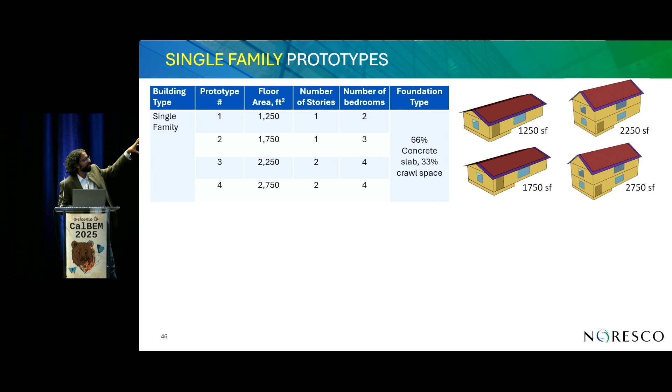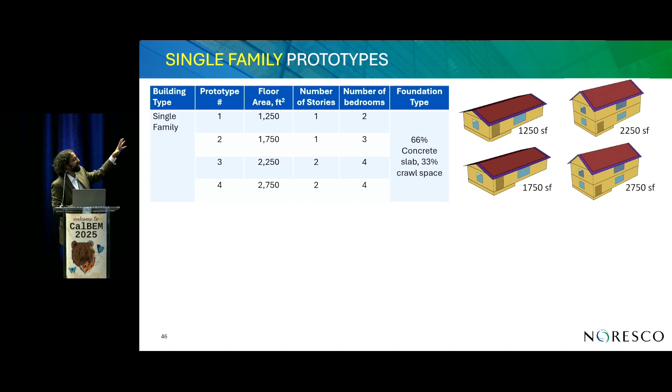So it's really important to get this part right, because everything else will be based on that, and having this representation of the stock is really important. This table shows the 4 prototypes, the number of stories, the number of bedrooms, and the foundation type as well—all based on data that we got from RASS.

We also looked at vintage bins. We've gone with 4 existing vintage bins and 1 new construction vintage bin, again based on a lot of data from RASS and other sources. We looked at when construction happened within the state—there were periods of economic boom and bust, so that was one criteria. Another was when the codes experienced a significant amount of change. A third criteria was technological breaks, like going from a single pane window to a double pane window, which happened around the 2005-2006 period. Those were the kinds of factors considered when we decided the vintage binning.

You can actually go more granular than this, but there's also the aspect of being too granular and having too many models, because when you're doing policymaking analyses, you don't want too many models—that creates another problem, which is managing all of the data that comes out of it, doing QC, managing the data, and so on. So we've created this as an intermediate between being too simple and too complex, and there's basis behind that which is documented.

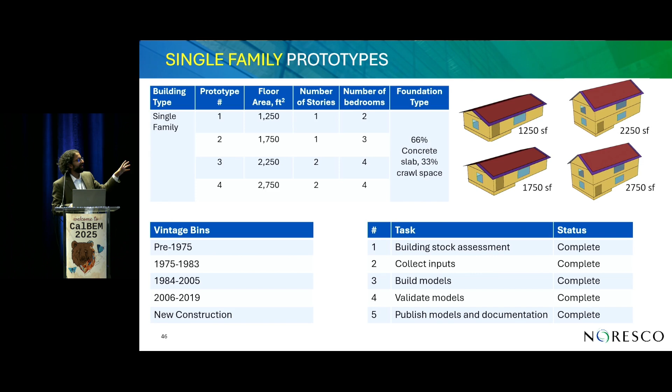So here are the different phases. All of these are now complete: the stock assessment, the input collection, building of the models, and the validation. The models have been published, and the documentation is available as well, so you can go access the models, and I'll show where that's located.

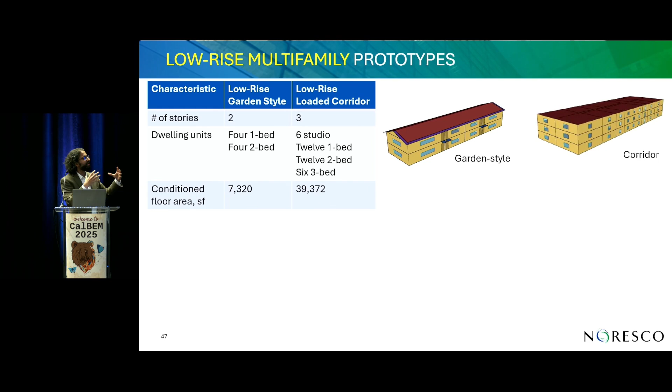Next up are the low-rise multifamily prototypes. These two came from TRC, a study that TRC did, again funded by SCE. That study also looked at the building stock and various data sources, and they based the prototypes on the distribution of number of bedrooms, the floor area of a studio apartment versus a 2-bedroom apartment, and so on—matching that distribution in the stock with what's in the prototype.

When we looked at these prototypes, I should say, for every sector we also looked at all of the existing prototypes—the DOE prototypes, the CEC prototypes, and the CPUC prototypes. In this case, it turned out that the CEC prototypes were a very good match with the building stock, so we didn't have to do any development work. We just went with what was already there. So the LRMF prototypes worked really well.

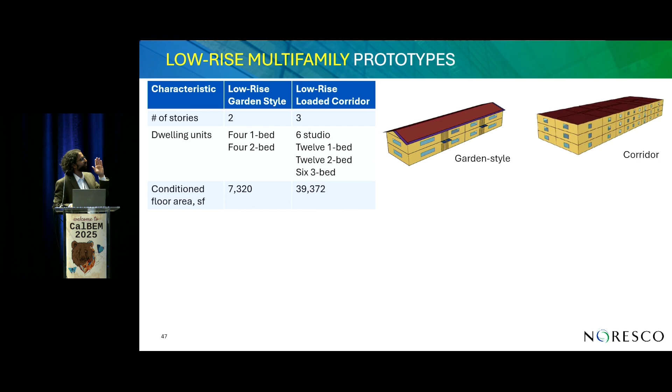The vintage bins are the same as single family, and again, all of the steps have been completed, and the models are available.

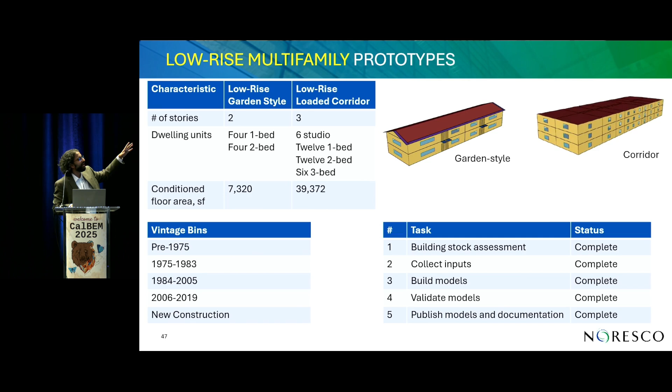Both the single family and low-rise multifamily prototypes were based on RASS data primarily, though other data sources were used as well. But coming to non-res and the high-rise multifamily prototypes, we shifted to CEUS.

CEUS data was compiled. The survey was done in 2022, and data started coming out from the CEUS team around late 2024, so we are just about a year away from that.

Once we started to get that data, we dived into it and tried to collect as many inputs as we could. There were other data sources like CBECS, the assumptions from the PNNL models and all of the work PNNL has done, as well as the CEC, ACM, and data from other sources in California. This list of prototypes was vetted with the TAG.

We looked at what the CEC had, what the CPUC had, what DOE had, and what the stock requires for a good representation. So this is the outcome of that study - these are the prototypes that provide a good balance between what's out there and what's in the stock.

There are some really cool things in here. I don't have time to delve into all the details, but I'll mention one: the office prototypes. They've long been criticized for having too simple of a zoning layout - just 5 perimeter zones and 1 core zone. So one thing we've done is try to go a little bit more detailed and add more detail to the spaces.